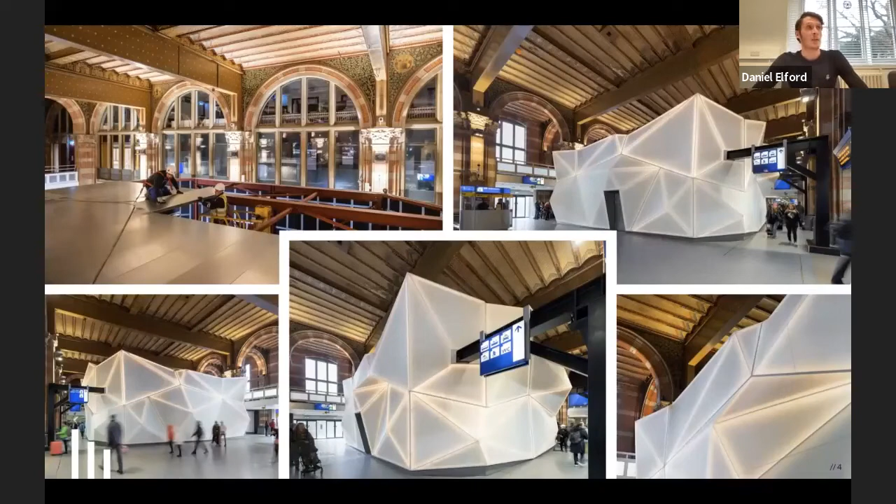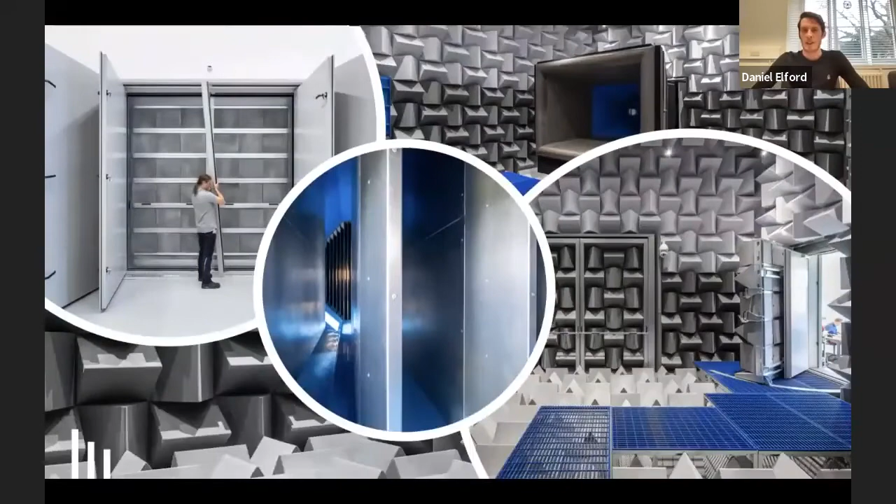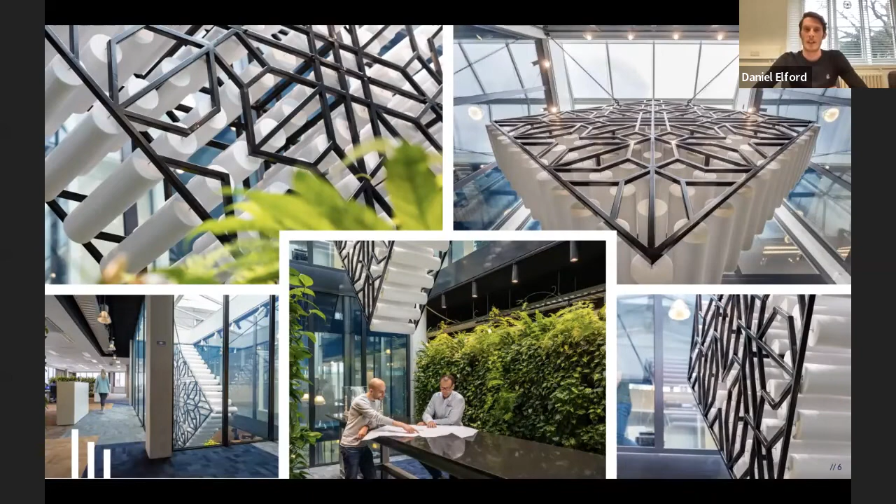Here's just some examples of the typical projects we deliver using standard materials. This is a noise enclosure which got installed in the centre of Amsterdam's train station. We also do things like anechoic chambers using different types of standard acoustic materials, and sort of residential, office, commercial spaces in terms of improving acoustics. We also have a division that develops and designs special doors for different types of architectural acoustics and other conventional sound problems.

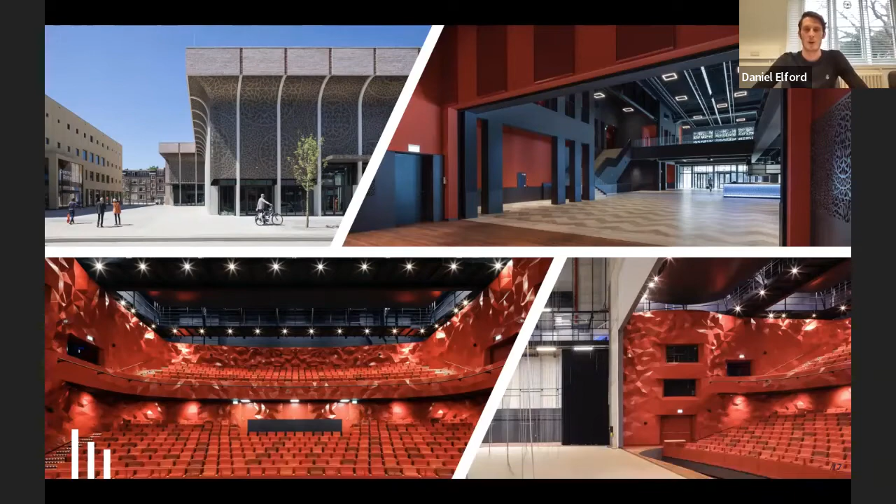The thing to highlight with all of those types of solutions in our group companies is that they all currently use the conventional approach to treat noise. This is where metamaterials come into their own, because conventional acoustics, the acoustical performance you achieve in the real world, is all to do with the material properties of the solution you're installing.

In terms of acoustics, two main aspects govern the acoustic performance: transmission loss, which is effectively stopping sound, and absorption. The key thing to highlight is that with both of these aspects, it is very difficult to mitigate or reduce noise at low frequencies due to material limits. All standard acoustic materials work much better at higher frequencies than lower frequencies.

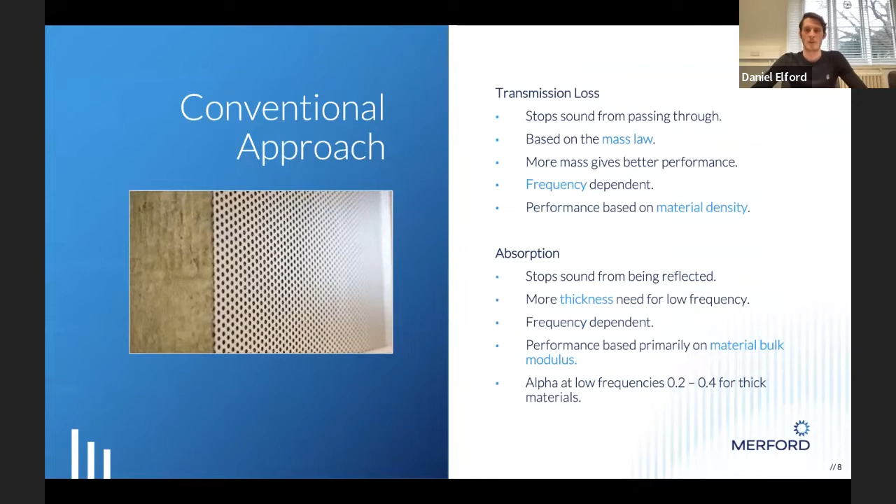What you usually find in the market is a brute force approach, using heavier, thicker, more massive objects to block low frequency noise, which means it's more costly and not a great solution. There's a secondary issue with low frequency noise too, because it travels further and contains more energy, so you get more noise complaints from low frequency noise than you typically do at high frequency.

This is where we've started to use metamaterials. I won't repeat the standard definition, you've probably heard it a lot today, but I used to say these have acoustic properties not found in nature. However, there was a very recent publication that worked out a moth's wing was actually a type of acoustic metamaterial, so I've had to change my definition slightly. In short, a metamaterial is governed by its geometric structure rather than its physical or material properties.

What we do at Sonobex is alter, tailor, and optimize a coupled resonating system to enhance acoustic performance in the frequency areas of interest that we really want to target. That's where the difficult noise problems come in.

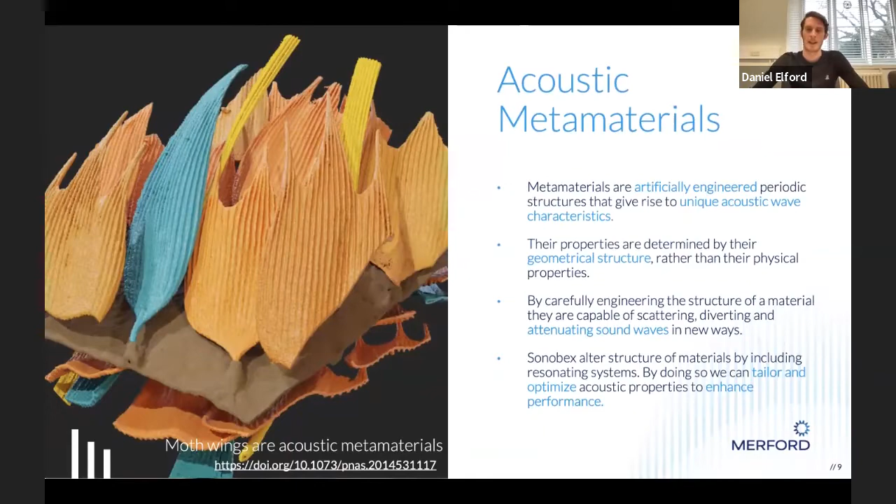So what we developed at Sonobex is what we call NoiseTrap panels - effectively an acoustic metamaterial based panel system, which we can use to build enclosures, screens, and the standard types of acoustic solutions from this new technology. What's very beneficial about this technology compared to conventional solutions is that we get very high performance in the low frequency bands in terms of transmission loss.

We also get perfect absorption in the target frequencies our metamaterial is designed for, so we have superior performance. Because a metamaterial is not based upon the material inside it, we don't actually have any acoustic infill or mineral wool to give you acoustic performance, which is standard in conventional noise solutions. This also enables us to allow passive ventilation through our acoustic panels, giving cooling and thermal comfort into buildings or machinery enclosures.

Because there's no mineral wool inside these panels - typically, if a mineral wool based panel gets wet, it will reduce its acoustic performance in the real world, and the mineral wool will degrade quite quickly over time. Our constructions are made completely out of steel with no mineral wool inside. We still use steel because these get installed into industrial environments, but we could make these out of any rigid material, such as plastics.

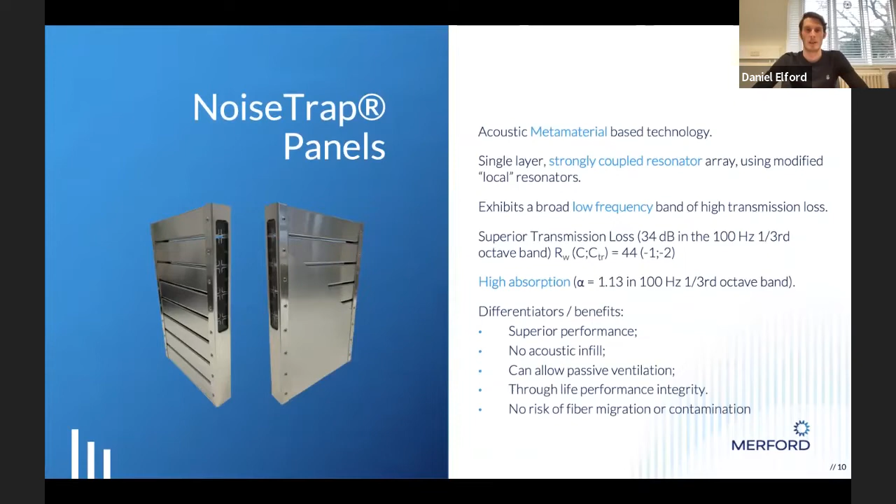I touched on the no acoustic infill properties of these panels - this has additional benefits. For example, if you're installing a noise enclosure around an industrial piece of machinery, a conventional acoustic panel with mineral wool inside will actually act as a thermal insulator, causing your asset or machine inside the enclosure to heat up, and in some cases you can have breakdowns due to thermal overload.

I mentioned the through-life performance - the acoustic performance of our panels is the same on day one as it is 30 or 40 years later in terms of lifespan. There's no acoustic material to degrade inside our panels, which also means you don't need to weatherproof our system. A lot of acoustic or noise enclosures are fully weatherproofed just to protect the rock wool or mineral wool inside.

We can also use these panels for really difficult environments, such as food preparation, clean rooms, and hospital environments, because there's no risk of fibre ingress into, say, an operating theatre. That's a really key benefit of having no acoustic infill.

And it also makes the panels very easy to clean. There's nothing to absorb dirt, chemicals, and things like that. You can literally just pressure washer them down without actually damaging the acoustic performance of the system.

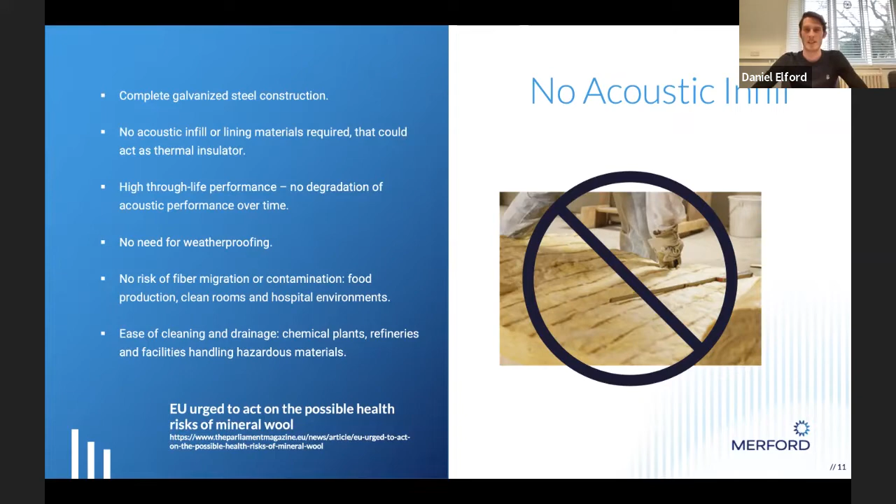What we have from our panels, we've actually managed to develop a series of acoustic panel systems that we can build enclosures for, which have a different range of performances with targeted frequencies, depending on the machine for application.

One thing we look at here at Sonobex is we're heavily involved in the power generation, transmission and distribution markets. And 100 hertz frequency of noise is a very key common problem where we have superior performance compared to conventional based solutions in these low frequency regions.

So this makes it a very good fit to apply metamaterial based panels into industrial sectors for the benefits I highlighted on the last page, but also I want to focus on the naturally ventilated enclosures because we can provide passive ventilation with no acoustic weak points as well in an enclosure design.

All of our results are fully independently accredited as well in terms of the transmission loss and the absorptive performance, and we can happily share results if people want to look at those.

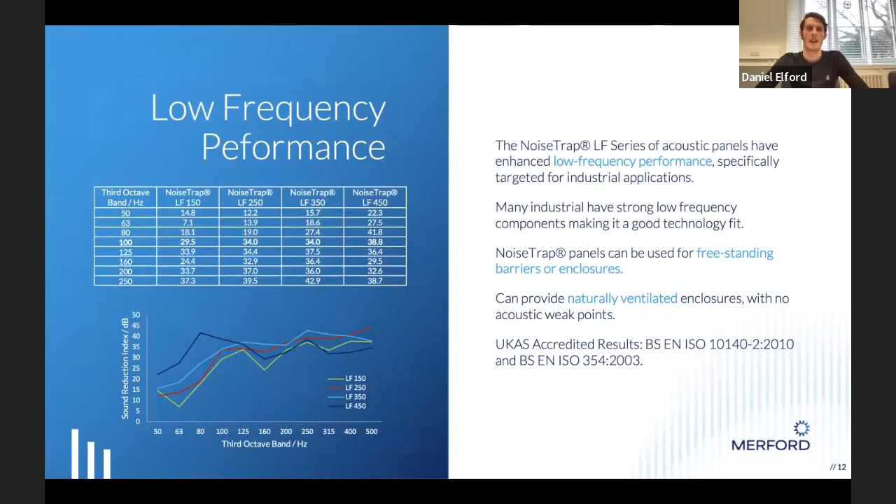To put it into perspective, this is basically a comparison from our metamaterial based panels on the left to a conventional based panel on the right hand side. I just want to highlight some key numbers on here. So with our LF250 panel at 100 hertz, we get 34 decibels attenuation, where a conventional panel on the right here only achieves around 23 decibels.

Things to note is what the panels are made from. Ours is carefully and cleverly folded sheet steel. The panel on the right here is actually made up of a sheet of perforated material. You have two 50 mil thick pieces of mineral wool, 2 sheets of plasterboard, another sheet of mineral wool, 2 more sheets of plasterboard, and then a sheet of steel on the back.

And this conventional solution weighs 113 kilograms per meter squared, where our panel is only around 53. So we get much better low frequency performance with half the mass and half the thickness of our panel in this case. And another thing to highlight here is the RW value.

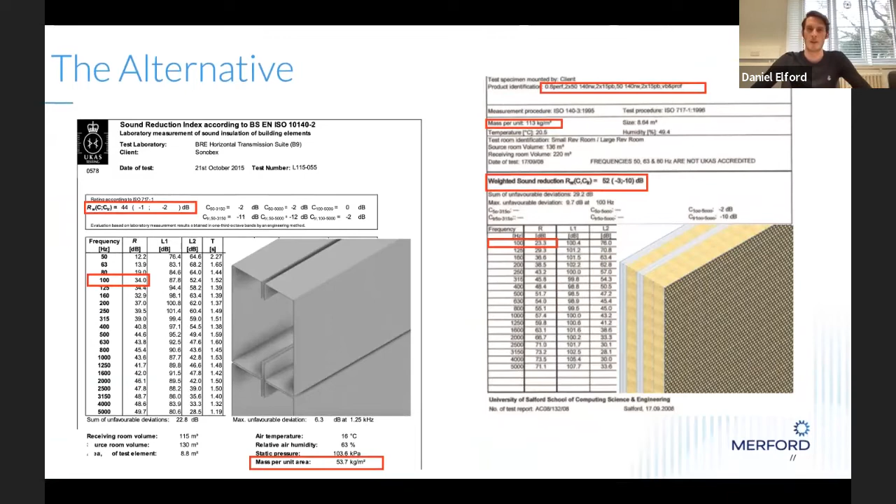This is basically the overall performance across all frequencies of our panel. And what you have in terms of a traffic noise weighted spectrum, you -2 from the 44 to get 42. And the panel on the right, you have 52 -10, which gives you 42 as well. So across a broadband sound application, they're equivalent performance, but we have much better enhanced performance at low frequencies.

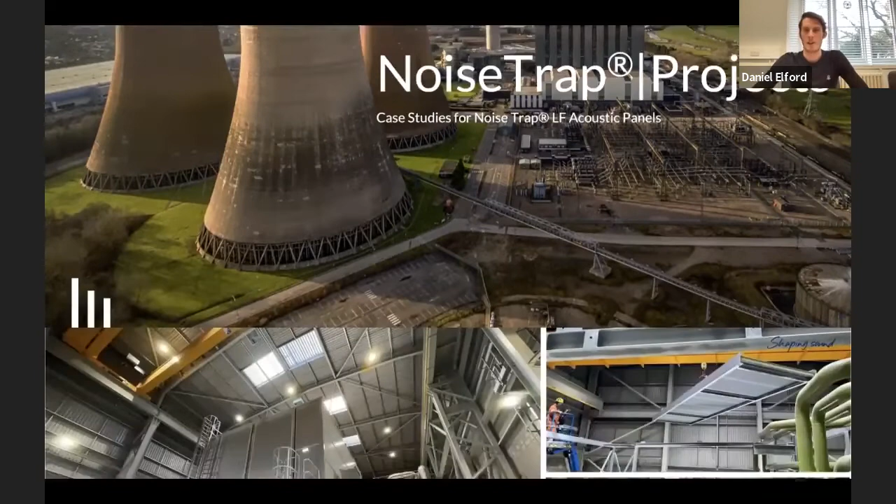So I just wanted to show you some case studies and real world applications of these. They're just some nice pictures of the enclosures, but these are all low frequency noise problems that also required some sort of ventilation, where we installed our noise trap panels here.

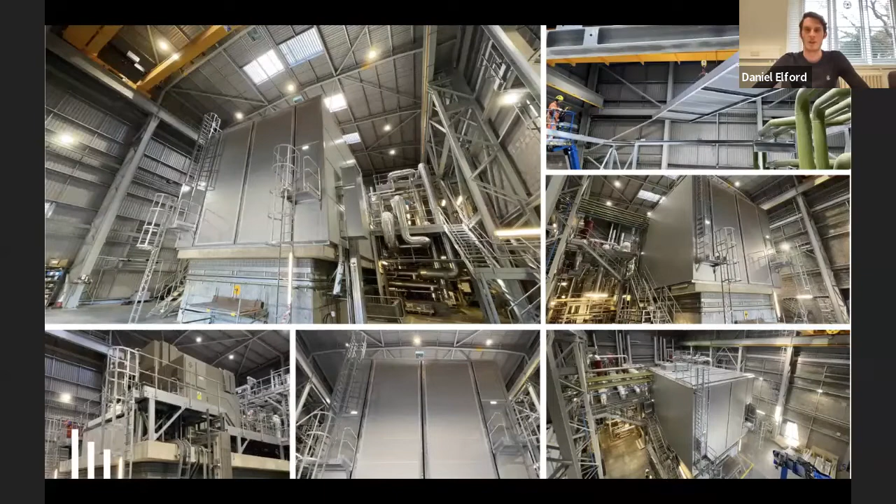This is a very large electrical generator connected to a steam turbine, and there was a 100 hertz noise problem in which residents were complaining about. For this client, it took nearly 5 years to find a robust solution for this. And the Sonobex metamaterial based panels was actually put forward and installed last year here.

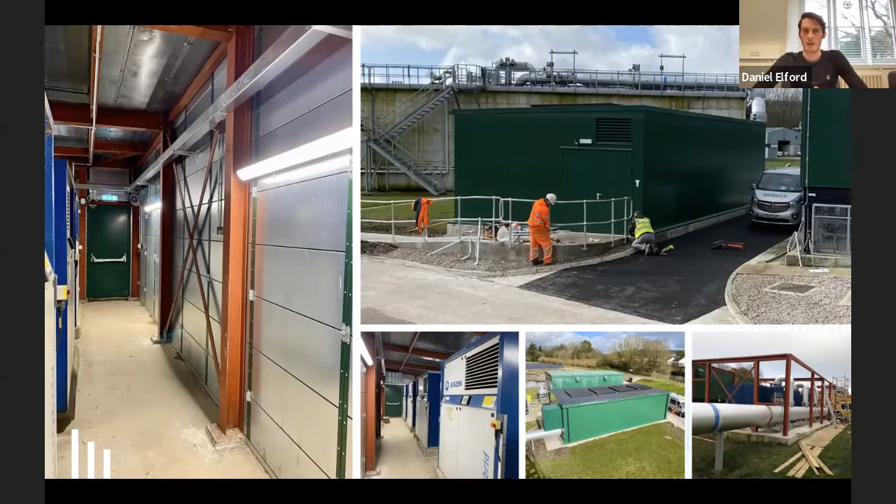Another example here is actually for some blowers at a wastewater treatment works, a similar type of problem where there was residential complaints of low frequency noise. And again, we installed our LF150 noise trap panels here to mitigate that low frequency noise, but it also gives you that broadband performance I talked about.

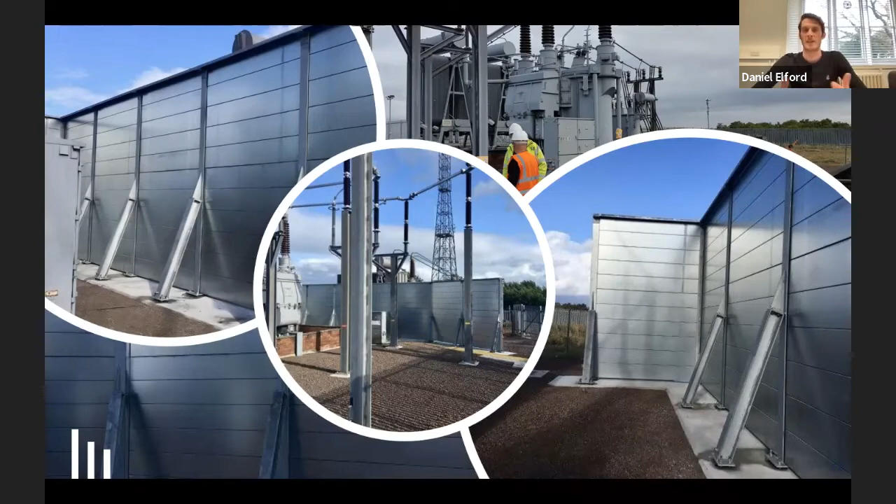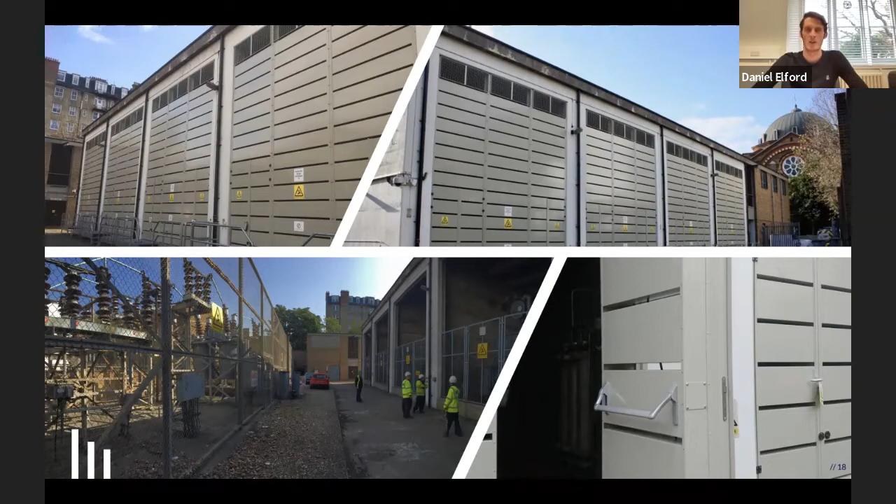A key thing about enclosure ventilation, especially in the electricity distribution market, is that if the ambient temperature is increasing, your transformer assets inside a substation reach what's called a hotspot temperature. So inside the machine, it's increasing its own temperature, which then increases the relative aging rate of a transformer. It's worth highlighting that over 15% of all breakdowns for transformers are due to overheating issues. So if we can adequately cool a transformer, you can actually prolong its lifetime without causing an issue in terms of acoustic noise.

What usually happens in a conventional noise enclosure is you have up to 1% of the area defined by a small grill or ventilation section. We've heard about some distribution operators actually opening doors on noise enclosures to allow for cooling of the machine, because it does create an issue, especially with mineral wool-based panels.

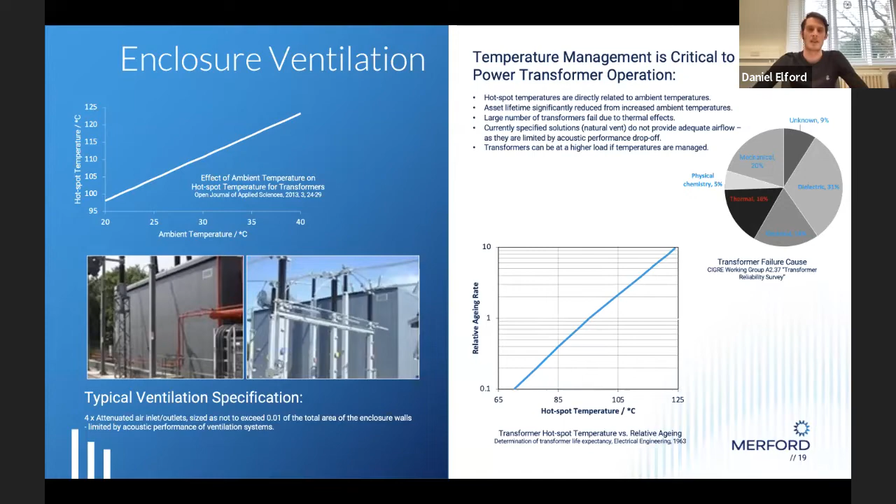I'll end on a slide about a project from Electricity Northwest Limited, where they started to investigate passively cooling a transformer asset, which allows us to increase the load on the electricity network. There's going to be more and more energy moving to electrical services as part of the energy transition. So this enables us to not overload, but increase the load on the network by allowing extra cooling to an asset, extending the lifetime of currently installed transformers, for example.

These pictures on the top left here show some of the solutions they came up with as part of that project, which only answered the ventilation aspect. But you can see here, drilling holes in the wall actually caused a big noise issue as well. So we think we've come up with a very good solution, hitting that low frequency acoustic performance while still providing passive ventilation for cooling of important asset machinery.

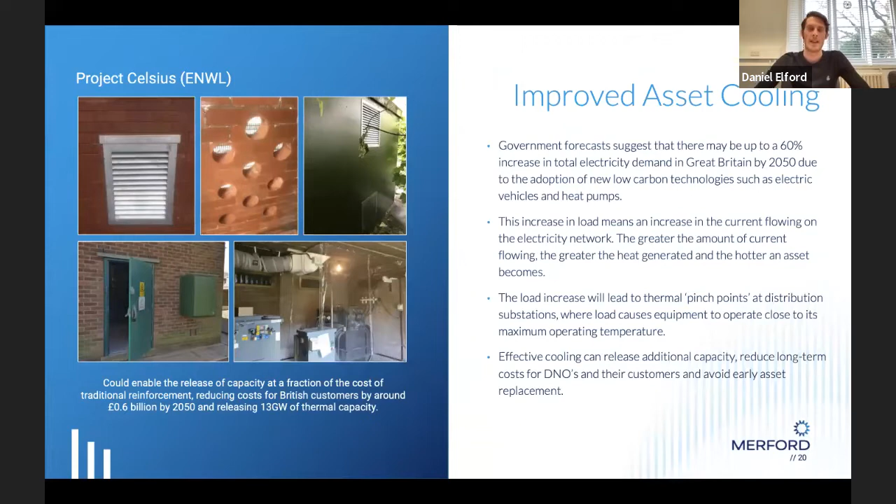And that brings my talk to an end. And that's my end slide there.

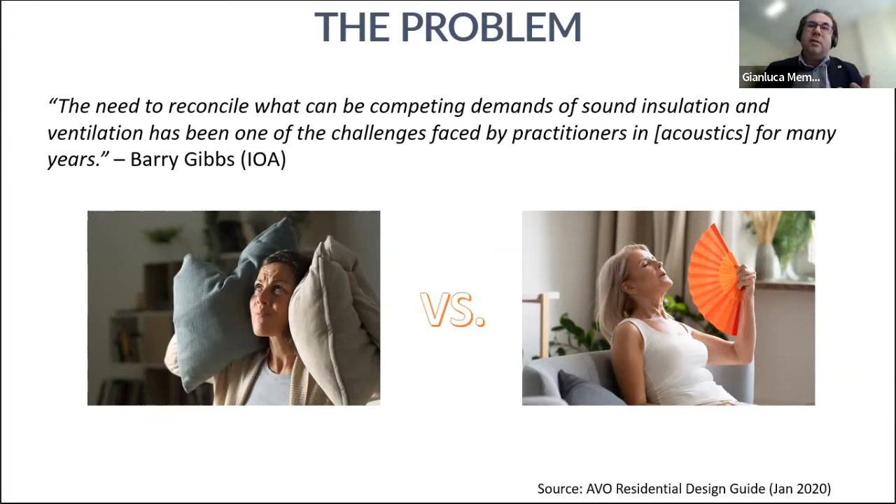It's not so tricky for the areas which are below 40 dBs, and these are the quiet areas, and according to the European Environmental Agency, they cover 30% of the population in Europe.

It's equally determinant to manage noise for the people who are living in very noisy areas, because their noise has been connected to problems like cardiovascular disease or negative cognition effects. So these people, however, tend to keep their windows closed.

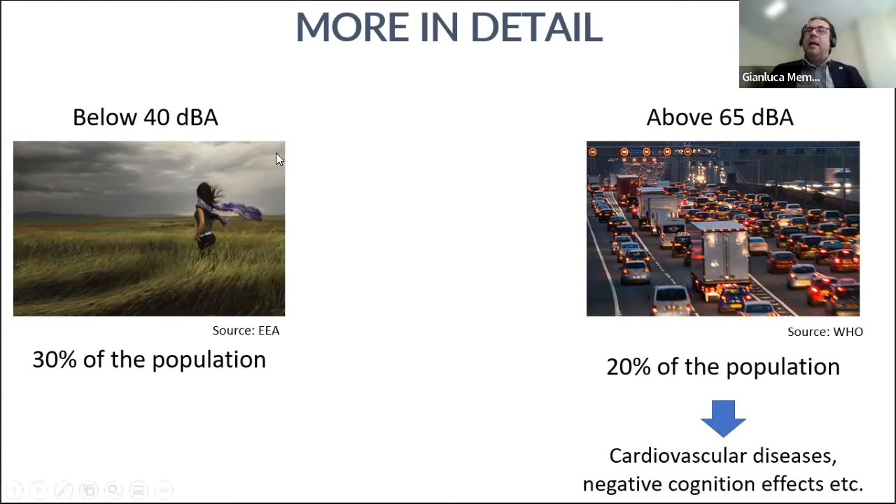And this leaves the rest of the population. For these people, there is a negative impact on well-being, which can be measured in millions of hours of well-being left or lost to noise.

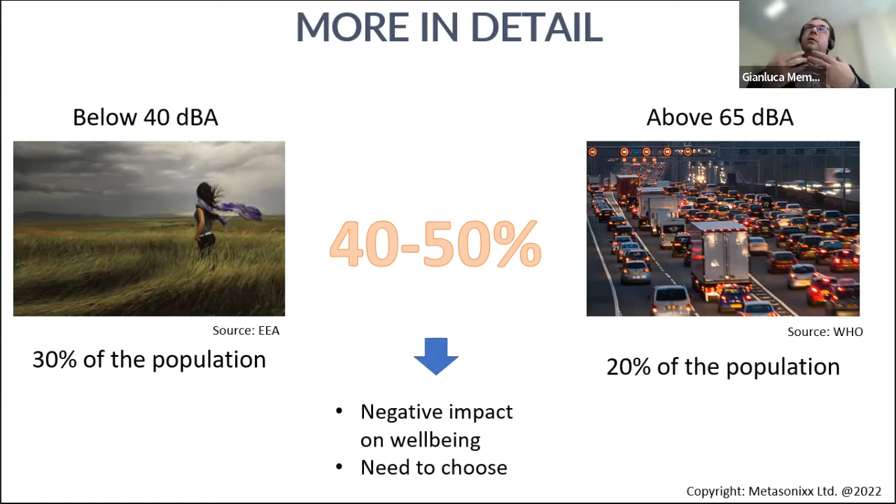For those people, you need a solution which can help them resolve this conundrum. So do I close the windows or not? If I have noise outside, what do I do? If I have my friend in the office talking on the phone all the time, or on Zoom nowadays...

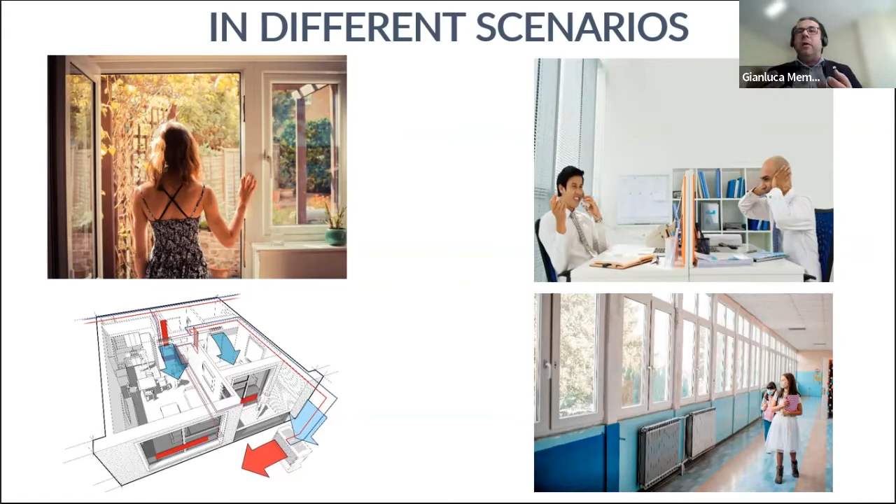If I have to design an apartment where for each blue arrow here there is actually a silencing solution to avoid the noise getting inside. If I have to manage a school where the pandemic now requires keeping the windows open and ventilation open even if there is noise outside.

So we heard already something about the existing solutions. You can use attenuators for air conditioning, you can use louvers, ventilators, sometimes in schools - these are thick. You can use acoustic windows if you want to pay a premium.

These are excellent, but they are all based on the idea that we heard Daniel mention earlier: you put mass or absorbers between you and the noise.

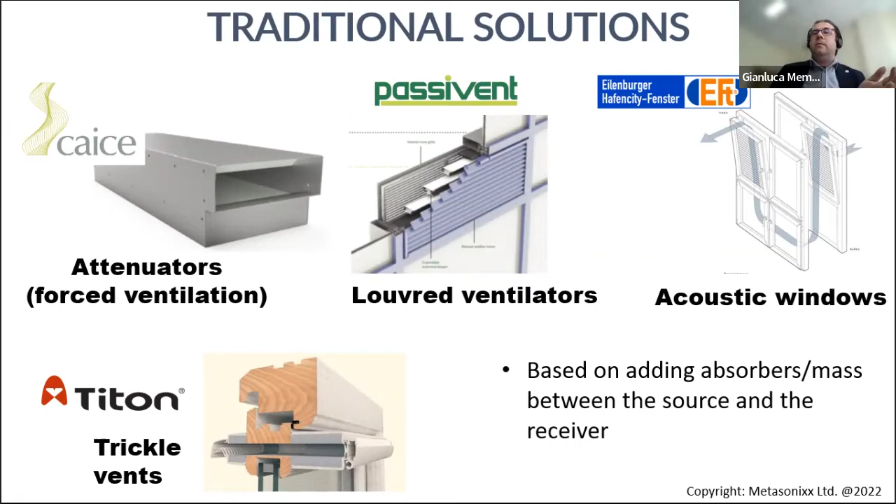Of course, the other solution is timing - you can keep your windows open for a bit and then closed for the other bit. Is that live?

So you have seen already Daniel telling you about their noise trap, and here I have two other examples of UK companies using metamaterials. One is KEF, putting metamaterials behind their speakers, and the other one is ours.

So the interesting bit about metamaterials is that it's the geometry that determines the effect. They are based on noise cancellation, and this allows the panels to be much thinner than traditional solutions. And as we heard earlier, in some cases, they also allow air through.

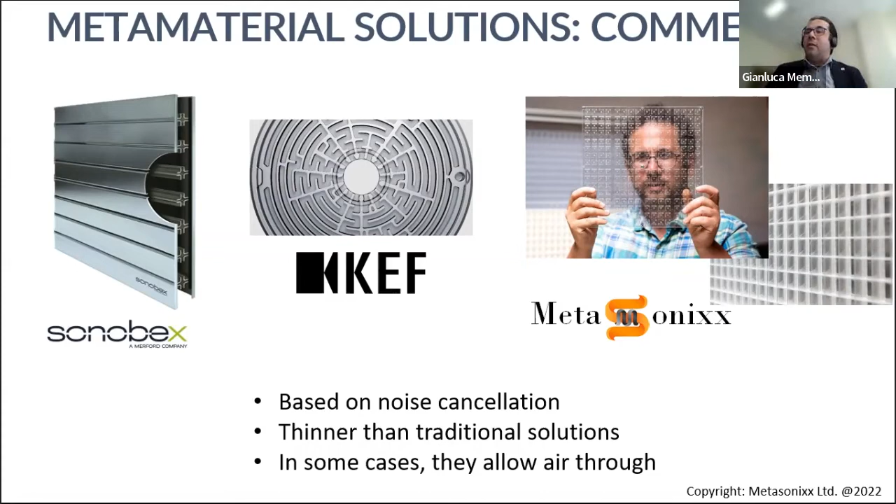So there is a lot of research, obviously, and you can see that the shapes are basically holes with a space around. It's a bit like a flute, if you want, or a trombone, where there is a hole where the air goes through, and the other part, the box around, contributes to changing the sound, which also goes through.

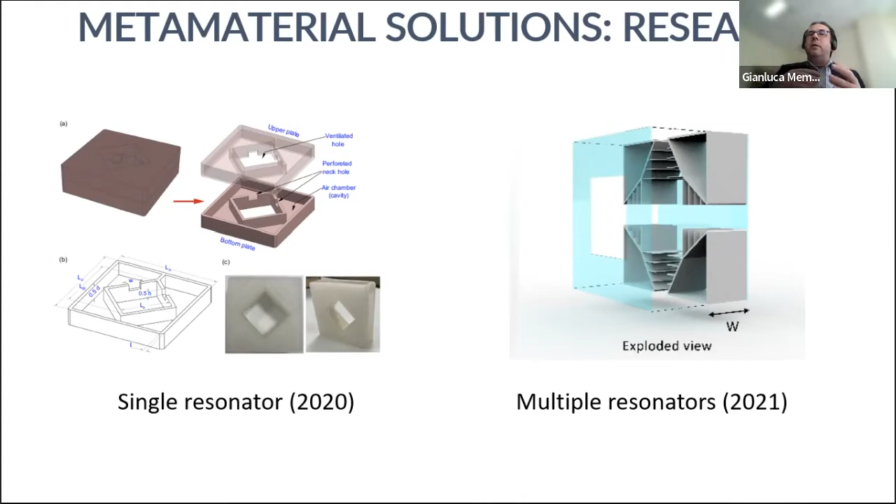So you can have single resonators, you can have multiple resonators, but this is extremely sensitive to frequency. That's why solutions based on geometries which are not necessarily resonant are often more performant than others. So let me tell you about our experience at Metasonixx in this.

So for us, building a metamaterial is a design effort. We start from poor materials, and then we discovered that you just need a set of predefined shapes that you can reassemble like Lego bricks - or just like you need 26 letters to make any words, you need just 16 shapes. And then you reassemble them according to different recipes to get the application.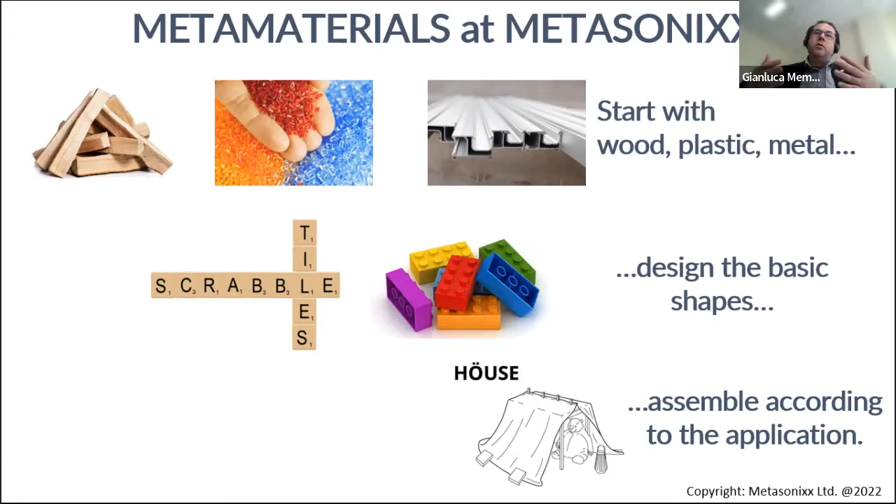This allows us to get standard recipes, but also custom recipes. This makes our SonoBlind panels modular, just like playing Tetris, because it's very easy to scale up. They're also much lighter than traditional ones - we saw some numbers from Daniel earlier - and they allow air through.

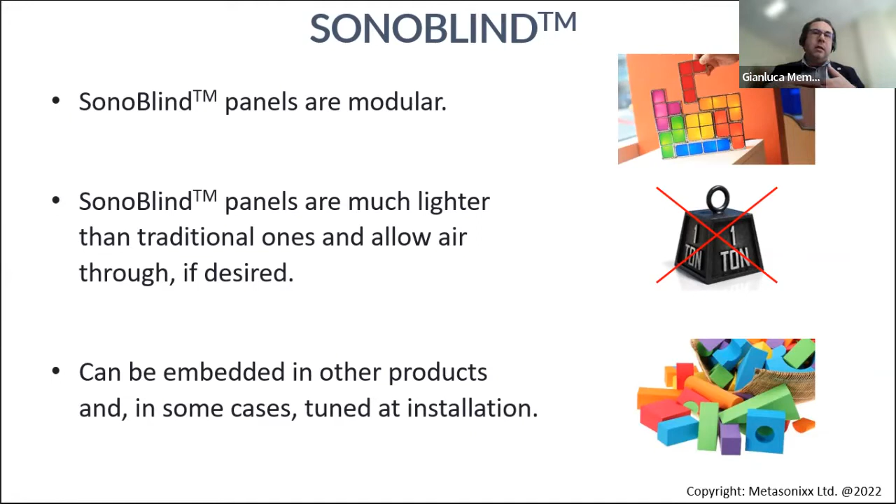But the other important bit is that because they are modular, our solutions at Metasonixx can be imagined in small bits that you can reassemble. They can be embedded in other products, and in some cases even tuned when you install them. We have some panels which let the songs of birds go through and not the rest of the traffic noise.

So I want to tell you today about two of our panels. One of them is fully transparent, and the other lets 50% of the air through. They are both based on the same idea: part of the panel lets the sound go through, while the rest creates a noise cancelling part that delays the sound so that when they meet on the other side they cancel out.

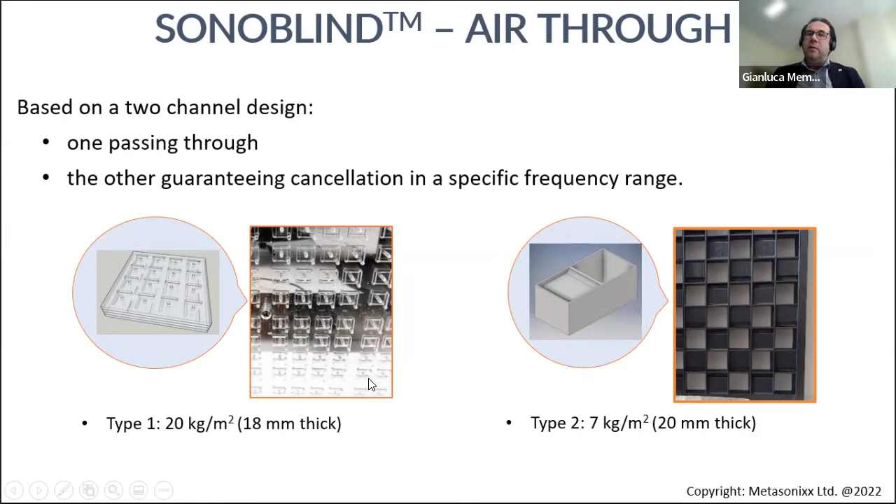You can see there is a large difference in weight between those two panels, and that will be crucial for deciding what you want to use in applications.

So what we did is install our panels to test their performance. We installed them on a window and asked Anderson Acoustics, a noise consultant here in Brighton, to help us make an independent test of our performance. I'll tell you why this is crucial again for metamaterials.

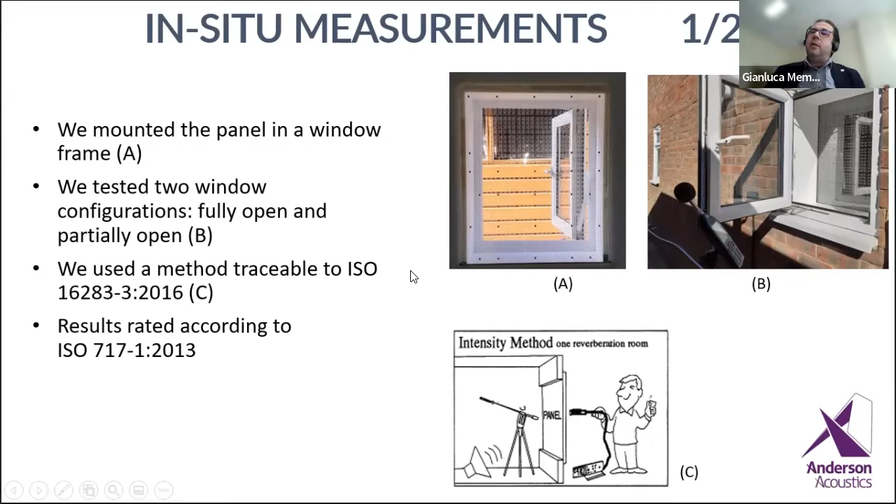So we mounted the panel, you can see it here. We had the window fully open and partially open, and they used a method traceable to an ISO standard. What they got is a response which is basically flat between 250 Hz and 4 kHz.

And the reduction was 11 dB A, meaning we are weighting the decibels with the standard weighting given to perception.

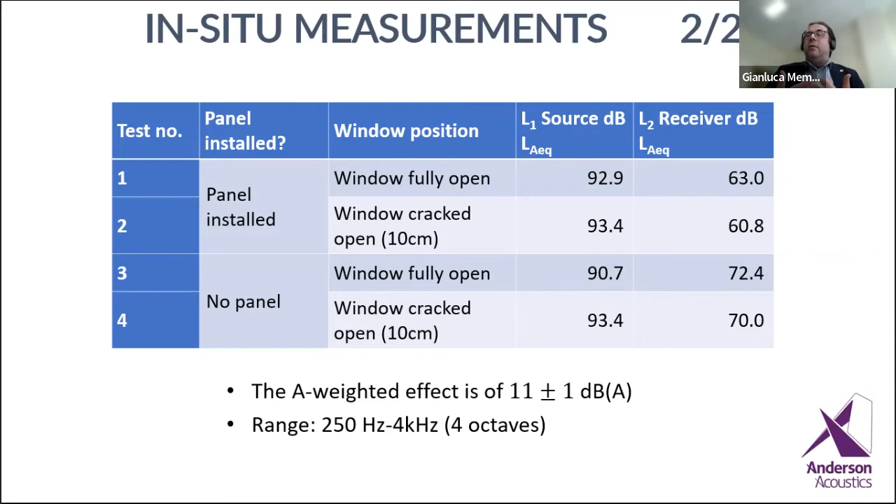So 11 dB is clearly not sufficient to bring high traffic noise down to levels of quietness, but it is determinant when instead you need to have a choice, and that's why we specialized in materials which are light and easy to move.

The other bit is that the standard method of testing materials in acoustics is to put them in an impedance tube, which is basically a cylinder in which you put your material, then put a reflector at the end, send the sound, and listen to what changes when you put the material in or not.

And that didn't work for our materials. So we had to invent our own method, and we benchmarked it with the in-situ measurement you have just seen. This shows that we were eventually able to predict and design metamaterials based on some key points of calibration.

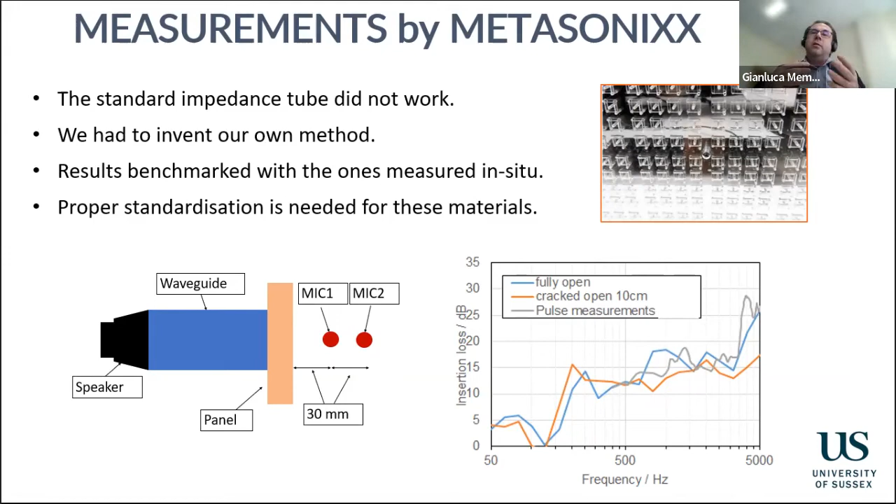This also highlights the need for proper standardization in this field, because metamaterials, as you have seen, have incredible promise, but if we cannot compare them using the same tools used for other materials, then it's a bit tricky.

So I mentioned another panel where more air gets through, and this one achieves 12 to 20 dB. It's specialized on a single frequency. It can also go up to 40, just like some we have seen earlier.

The point is the airflow and how you measure it. And again, that is an interesting point.

What we are doing here is we have a box made with a metamaterial which is perforated in a special way. We have a fan inside that lets some air through, and at the same time we are reducing the noise. So what we are doing is inventing, if you want, the way to characterize these panels to speed up their application.

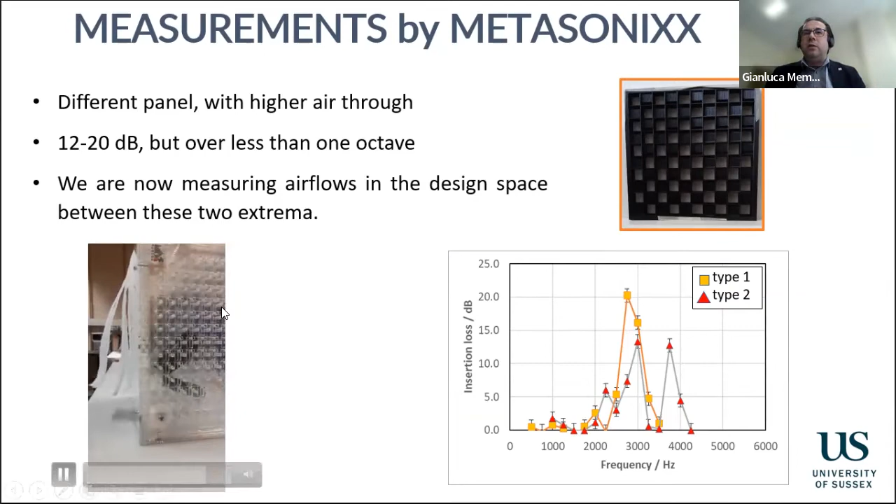So to end my turn today, I wanted to say that the challenge of managing ventilation and noise simultaneously is well known, not just in industrial setups but also in everyone's houses and offices. Acoustic metamaterials might play a key role in solving it.

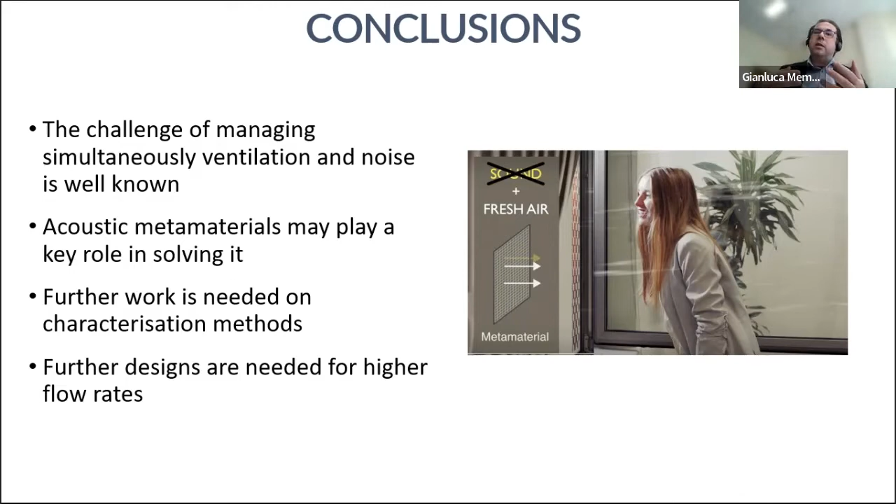Here we imagine a blind that you can pull down to block the noise selectively while letting the air through. Further work is needed on characterization methods for this type of material. And for us at Metasonixx, we are now testing further designs, with the idea of having different panels for different uses.

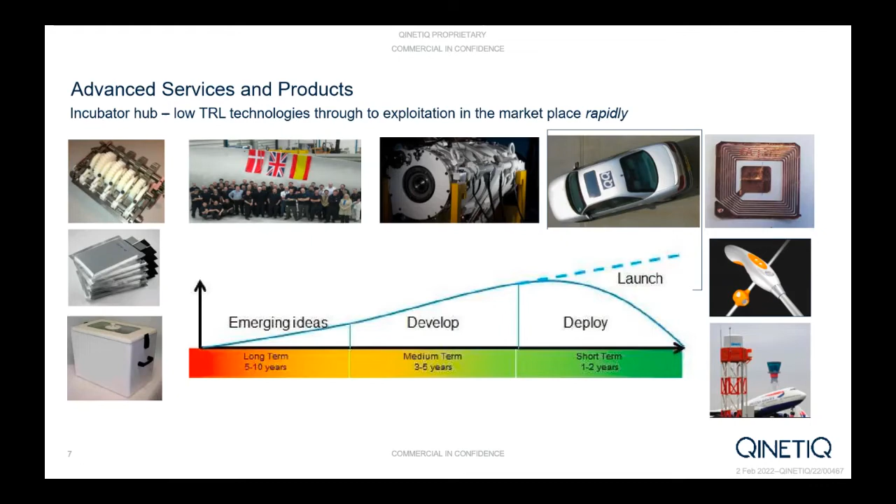Some of the things we do: R&D and product development are the centerpiece of QinetiQ. In terms of materials, the portfolio is incredibly diverse - you name it, we tend to work in that area - but we do have a product focus because it's all about taking technology to the marketplace quickly. We also provide advice and consultancy as part of our portfolio.

We also have some fairly extensive facilities for measurement, testing, evaluation, and analysis. A lot of what I'm going to show today relating to facilities, capabilities, and expertise is actually open access. So anyone who wants to tap into that, all you need to do is pick up the phone or speak to any of the QinetiQ guys around.

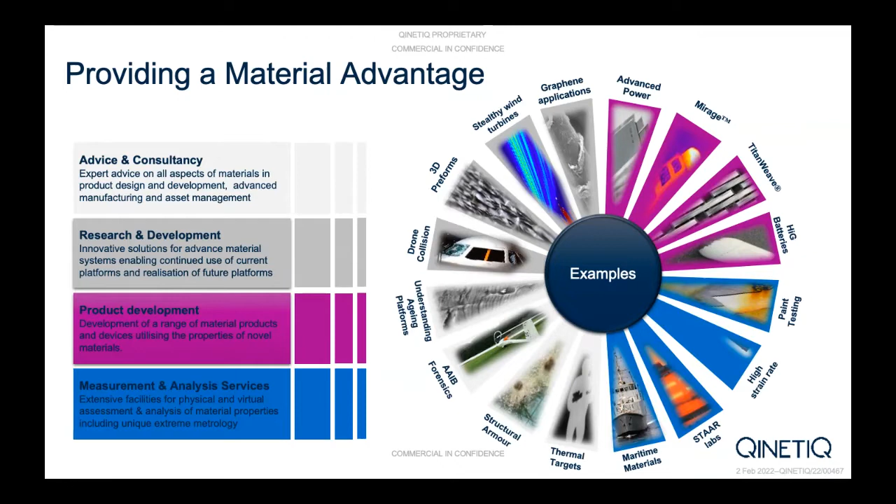This is an overview of what we do in the area of acoustics. We have capability across the acoustic materials area, which includes metamaterials but isn't purely focused on them - it's becoming an increasingly larger part of our capability. We have expertise in the design, development, and integration of those materials. It's fine having the materials, but you've got to use them in a way that turns them into product. Sometimes that's for large platforms in defense markets, or for health devices or prognostic technologies - all of those require some level of integration.

We also have some fairly unique acoustic measurement and model facilities - a lot of those are bespoke, areas that we've been developing and continue to do so. I'll give a little introduction to that as well. What's also really key in our area of acoustic materials is the ability to develop prototype solutions, but then undertake validation and testing. I'll talk more about that later in my presentation, but it's really important to understand some of the challenges new materials bring with regard to validation and testing.

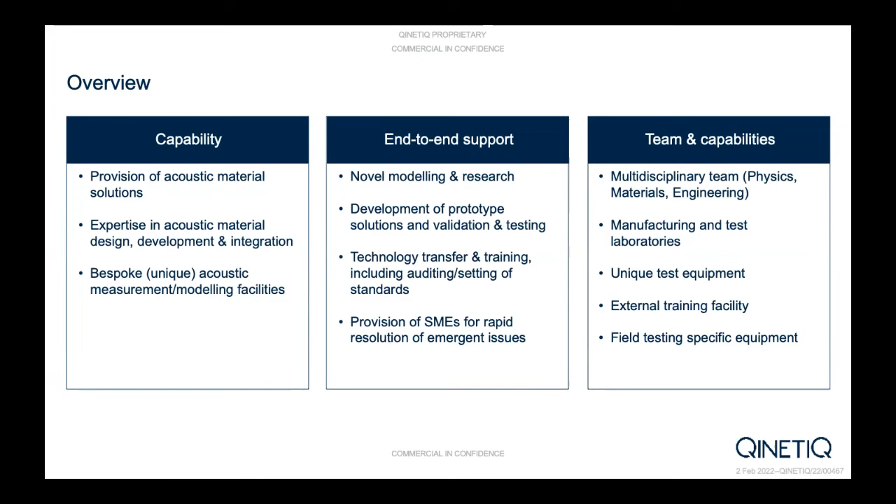This starts to give some information on some of the things we're involved in. On the left-hand side are examples of what were R&D programs, and actually some of this is going into product. But on the right-hand side, which is where I'll focus for now, are some applications and areas of interest. Vibration and shock damping, for example for engines or protective packaging, is really, really important. The acoustics of buildings is also very important - and I've had a great lead-in from the two presenters previously, but again, really important.

Communications, believe it or not - QinetiQ have a product for acoustic underwater comms. The picture on the top right-hand side is effectively a technology called STAR - simultaneous transmission and receive, where we're using acoustic techniques to get a wide field of view and then undertake duplexing with RF signaling.

Human performance is really, really important to protect the individual - how do you protect them from vibration, from shock? How do you prevent their eardrums from excessive noise, for example? It was enlightening to see the presentation from Gianluca, where he mentioned the cognitive effects of noise on individuals. So completely on board with that.

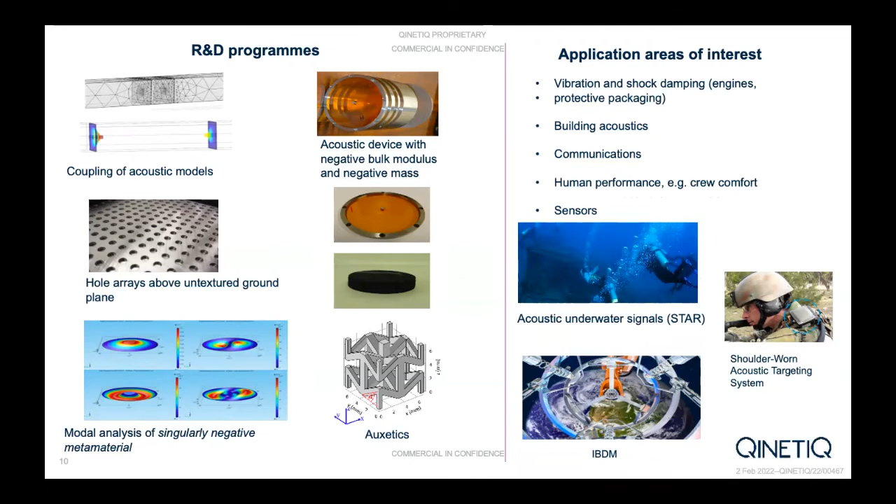As I've said, we have a whole range of facilities. Those range from some of the traditional facilities in terms of materials manufacturing, materials testing, but we also have access to and host a large variety of facilities through some of our larger programs, some jointly with the Ministry of Defence, where we have got effectively things like the ocean basin or the towing tank or flight simulators. Some of these are relevant for acoustics, for underwater acoustics, for example, which is a large part of our business, and these are accessible.

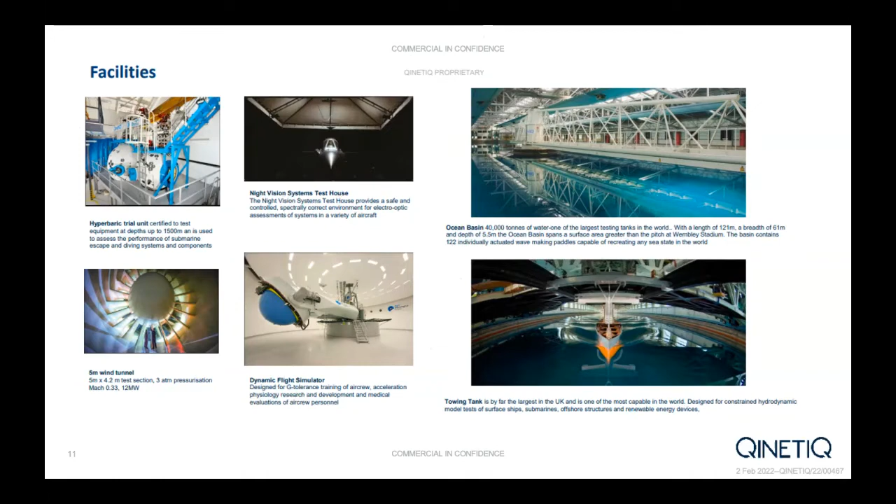So in terms of our acoustics work, what I've done is laid this out in four sections. We do a lot of modeling and prediction. We develop some of our own tools which are bespoke to do the things we need to do, specific to particular applications or problem spaces. So we have analytic and numerical techniques. We also have COTS equipment as well, COTS codes that we use too.

In terms of test and evaluation, that spans both airborne and underwater acoustics. There's work in the area of ultrasonics as well. So there's some pictures there of impedance tubes, pulse tubes, large area towing arrays in a tank, mechanical testing, transmissibility rigs, etc. Again, I can't emphasize enough, if anybody has a requirement for these, we're open to people approaching us to gain access to these facilities.

Formulation and manufacture, I'll say a little bit more about that in my next slide, but we have a whole range of manufacturing capability for small area R&D programs all the way to large area. That can include layered manufacture, coatings, bulk manufacture, composite materials. So all of those things we have available at our fingertips in our laboratories, based in a number of sites, but predominantly on the Farnborough site. We undertake a lot of application and assurance studies as well.

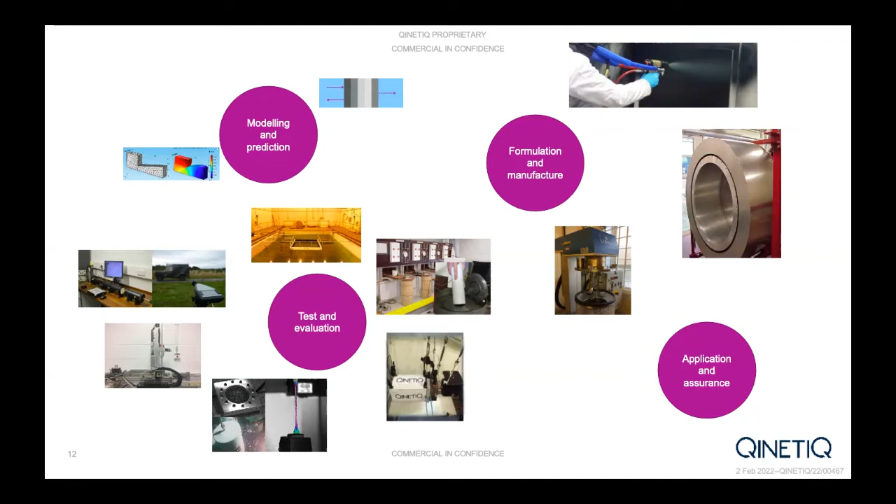Okay, metamaterials. So why bother is the question. Effectively what I'm doing is lining up everyone for some of the discussion sessions later on. The reason we're interested in metamaterials is because it allows you an unprecedented degree of tailoring of the properties of materials. You can do things with metamaterials that you cannot with other materials.

We're also looking at metamaterials for, let's call them mundane or more conventional applications, where metamaterials do offer advantage for things such as reducing the size and weight of materials. Again, you've seen that through the previous two presentations. But what really excites me is the ability to start looking at and thinking about new applications where, for example, you're rerouting energy in predefined ways. If you were at the plenary from Sir John Pendry, he spoke about topological metamaterials, and all of that is relevant in the acoustic domain as well.

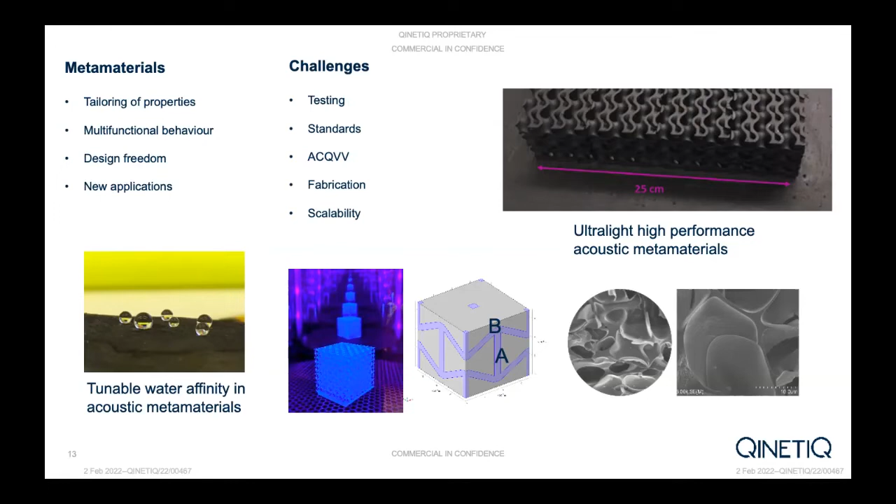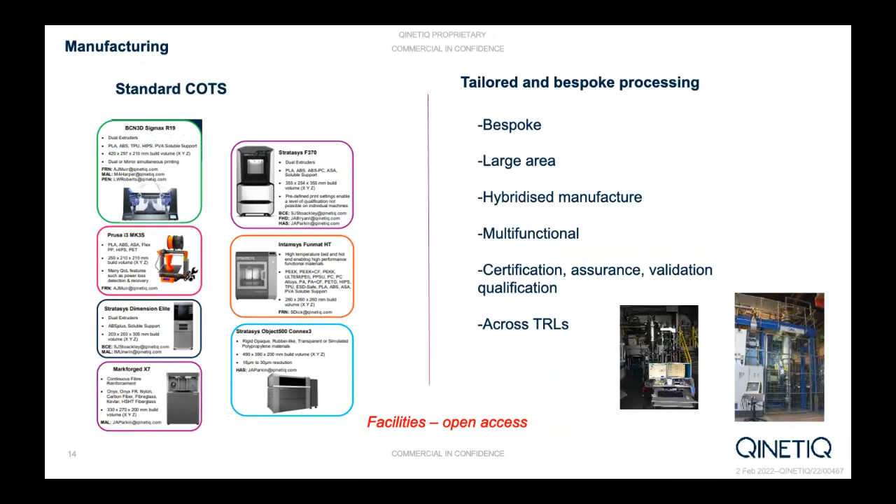We do work across all TRLs, that's very important. I think I'm being flagged to hurry up, so I shall go on to my final slide, if I may - how to work with QinetiQ.

Hopefully one of the themes that comes out of this is that we've got a lot of stuff, but we want to share it with you guys. It is about shared access, because what QinetiQ is about is prosperity for the UK and getting the technologies to market quickly. We can provide case studies.

We understand product development roadmaps. We can provide that safe environment to trial ideas. We understand technical requirements because we have a very wide network and customer base.

We work with over 300-400 suppliers, so we know what they want, and that's not just in the UK, it is global. We can work with you to develop the business cases, and we can help you access funding, directly or indirectly, across all TRLs.

We have those routes to market. We can help integrate supply chains for you, taking out a lot of the issues that businesses, particularly startups, face. We're there to help. So effectively, come and talk to us.

We are on the other part, on the exhibition, so pop in there or come and have a chat anytime. And I'll finish there. Thank you very much.

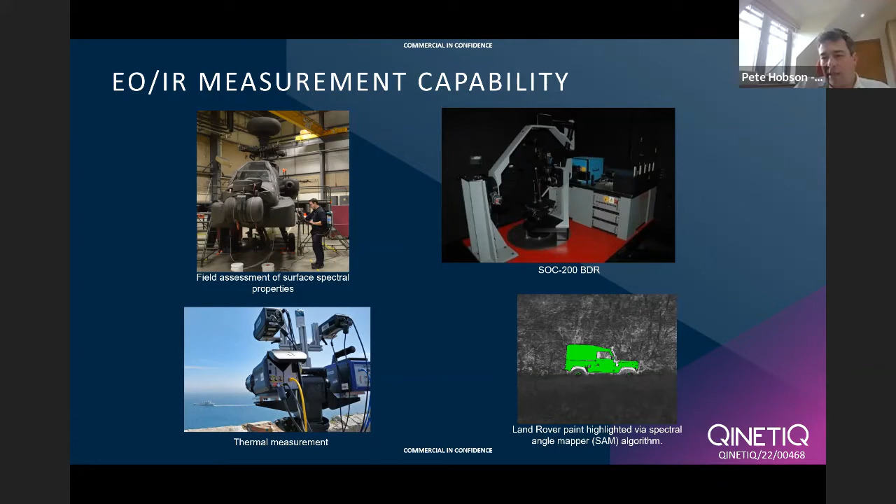If you do have an unusual and interesting measurement problem, perhaps to support your research or for measurement of a product, as Sajad said, do contact us and we'd love to see if we can help.

So I'm just going to talk very briefly about the combined acoustic-thermal problem space. I think I'll just relate a quick story I heard.

I was talking to a guy heavily involved in the Australian mining industry, and they have a preference, at least there, to use female drivers for their heavy plant machinery. Female drivers have generally been found to result in fewer maintenance issues for vehicles, fewer accidents, fewer wear and tear - just generally more considerate drivers. However, the vibration effects of these bits of machinery are absolutely significant - they can result in numbing of nerves, shake up your digestive system, even spinal injuries. Due to perhaps damage to or perceived risk to potential women's fertility, the Australian mining industry was sometimes asking people to sign disclaimers before they became drivers, or even discouraging women from driving these vehicles at all.

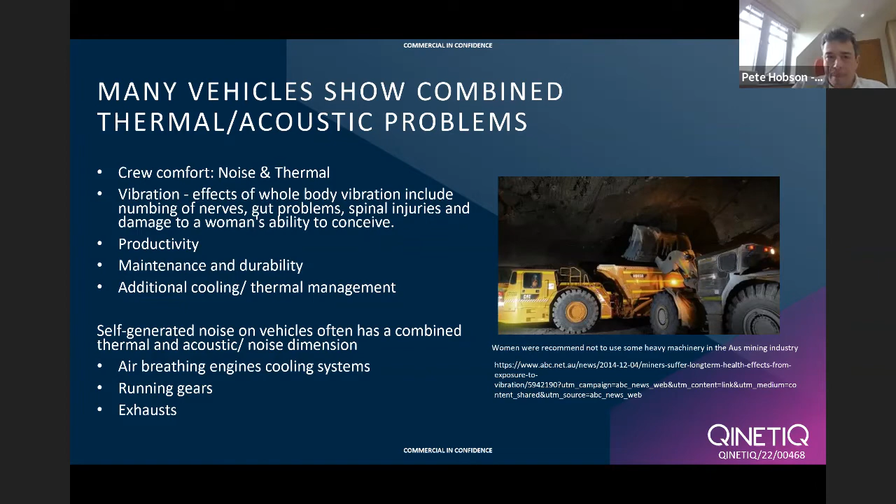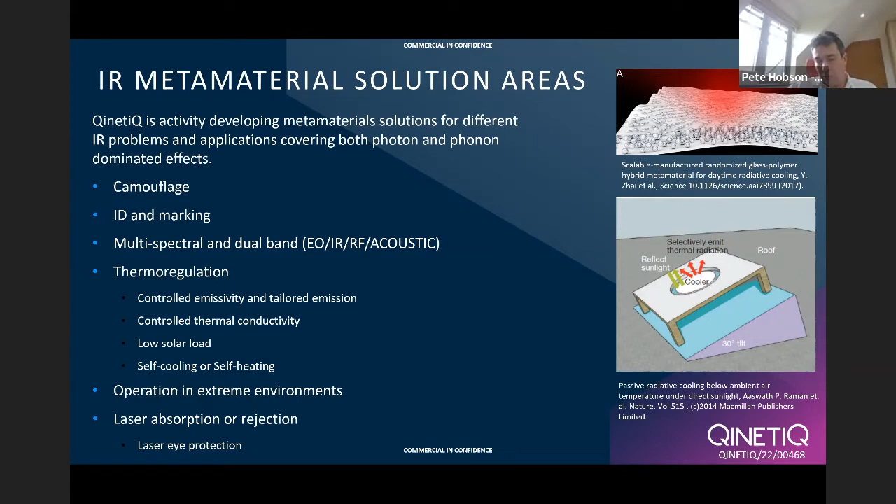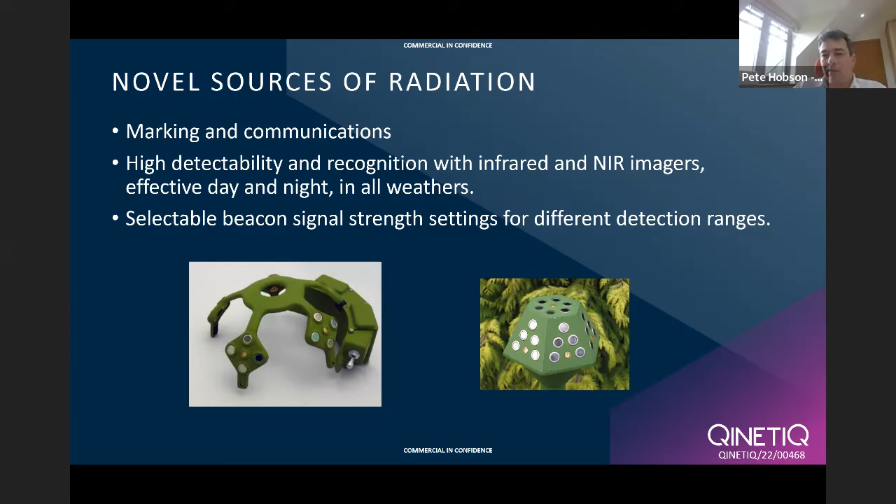In terms of metamaterials applications, one of the things we're interested in is marking and free space communications. Here we have two pictures of QinetiQ products called beacons. Generally speaking, it's a class of beacon that has thermal emitters in the thermal infrared and the SWIR band infrared. We're interested in making these more selective, more discriminating, changing power settings, maybe even changing polarization settings at will, and metamaterials offer a massive opportunity for that area. What's nice and unusual, perhaps, for some metamaterial solutions we look at, is that they're not massive area ones - it's something we can make in a small area.

Slightly larger area applications are in passive marking technology. This is something that has been sold for a number of civil security marking markets and involves constructing an ID symbol which can be placed on the top of vehicles or on the side of vehicles that works simultaneously in the visible and the thermal infrared. We can change the contrast in both bands at will. These are unpowered, so as long as they're outside, you will be able to see them.

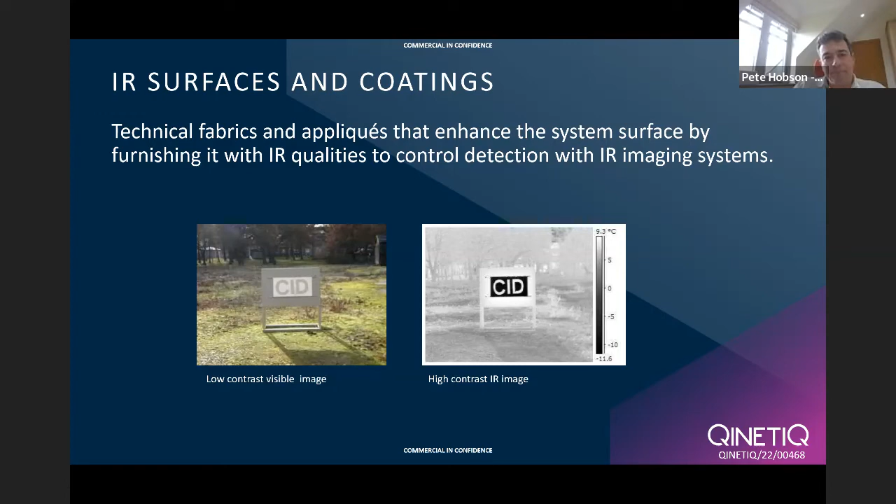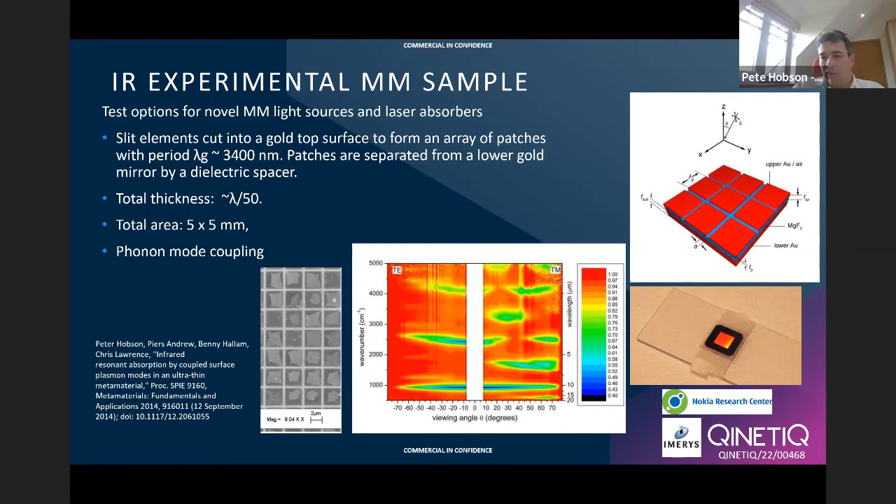So that was pretty much my last slide. Sajad has highlighted that we're very keen to talk to people with new technologies. We have a wide range of customers with very diverse requirements, and we're receptive and keen to hear about novel metamaterial solutions. So if you've got something we might be interested in, please do drop us a line. Contacts can be via the portal or hub, whatever we're calling it. The information's there, so please do have a look at it. Thank you very much.

Pete, I think we need to cover the questions now. Do you want me to? If you don't mind, I'm not one of nature's best multitaskers, so I haven't been following the chat while I've been speaking. That's fine, I'll read out what I've made a note of, and I'll do them in the order they were asked, so hopefully there'll be some sense to them. So I think after Daniel's presentation at the start, there were a couple of questions came in. Daniel, you might want to pin your ears back here and listen to what this question is.

How much area does it cover? Does it cover during installation? Does it target multiple frequency or single frequency? And what is the governing mechanism applied to your panels to mitigate the acoustic wave?